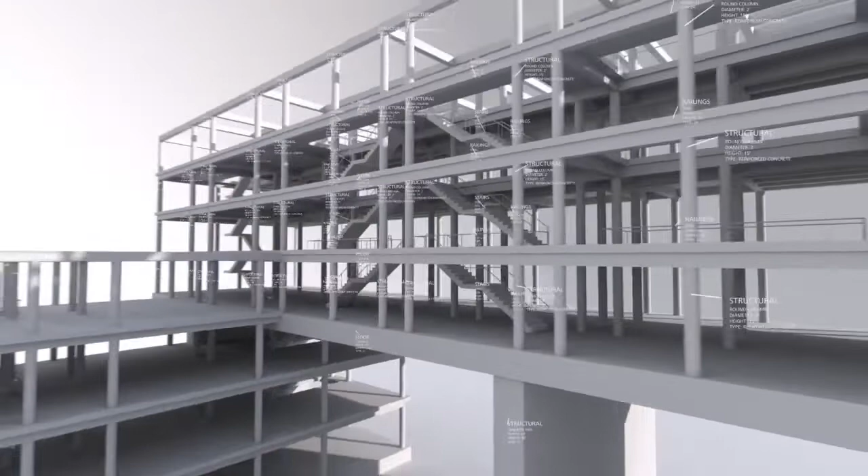BIM can improve coordination and communication between all invested parties. A BIM model illustrates the relationship between a building's spaces and systems, revealing any conflicts or problems. Traditionally, these issues might have resulted in errors or omissions in the contract documents, leading to cost extras and potential delay during the construction phase.

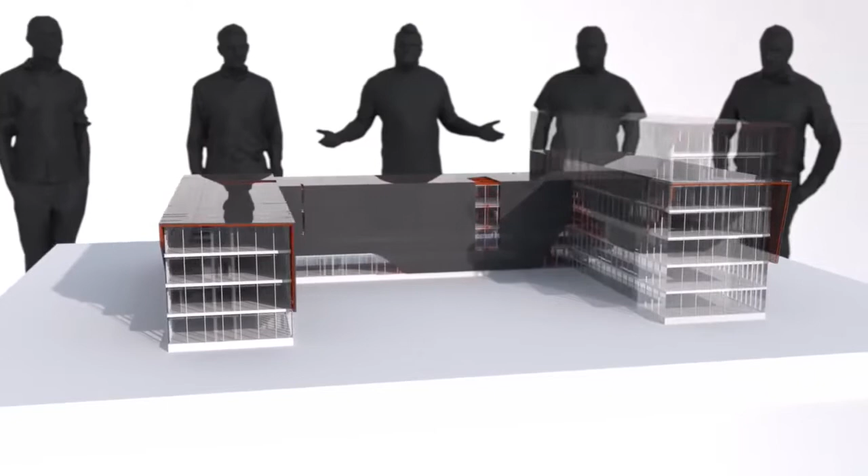A significant advantage of BIM and the use of 3D modeling tools is that all drawings, details, the specifications, and even the bill of quantities are derived from this shared model. With sufficient oversight during the production of the model, it becomes easier to avoid coordination errors and omissions caused by a lack of coordination between disciplines, or oversight in the completeness of the scope described within the documents.

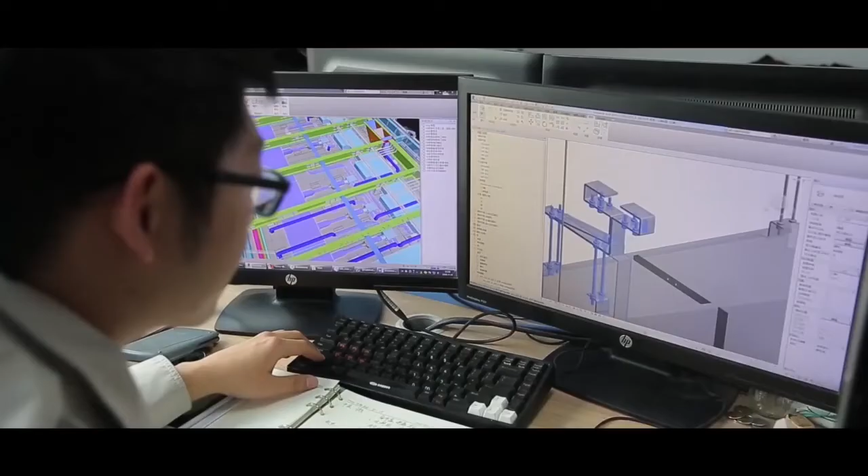In addition to generating graphical representation of building elements, BIM models also manage data associated with each element within the building. This data and the model are updated automatically as changes are made to the model. BIM, therefore, makes it unnecessary to recreate and interpret information each time it is handed off between participants. BIM makes the design information explicit and available to all stakeholders and supports decision-making in construction projects through better management, sharing, and use of information.

In contrast, project participants in the traditional production environment had their own information systems which were structured and suited for their specialized and specific needs. Therefore, the amount of information that could be jointly shared was limited due to the lack of a central source of information. Today, project data is easily accessible through diverse BIM software, which makes the sharing and control of project information more efficient. In other words, BIM gathers core competencies to jointly decide and address on-site-related problems more effectively.

The possibility to perform alternative studies such as energy, lighting, and acoustic analysis of the virtual model is of great importance, especially if the project scope includes designing a building with regard to certain environmental certificates. For standards such as Leadership in Energy and Environmental Design, LEED, energy analysis should be performed in the early design phase by linking a building information model to tools which measure energy usage for heating and cooling during peak periods.

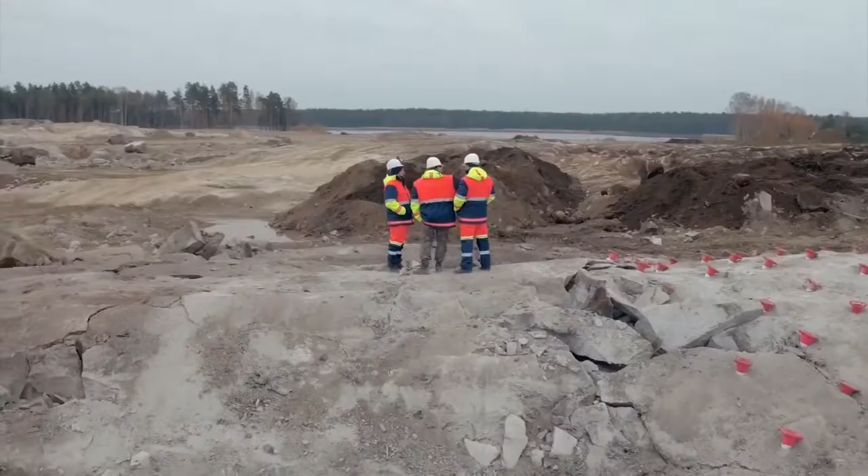It allows users to make energy-conscious decisions and test the energy-saving ideas, thus improving the building quality without postponing the design process. Performing deep sustainability analysis in the design stage is a capability that traditional design methods were not able to do. In accordance with aforementioned issues, BIM provides an opportunity to perform value engineering in an early stage, which enables the design team and project administrators to ensure the design intent.

BIM has revolutionized cost monitoring. BIM software allows accurate projections of total life cycle costs and costs in use. The same principles of data management within BIM also allow the total carbon impact of a project over its life cycle to be evaluated. Assemblies and components within the BIM model may be exported directly by manufacturers for fabrication, reducing the need for separate shop drawings. BIM works best when more project participants use it. Now, more than ever, the benefits of BIM are increasingly seen to outweigh the costs.

BIM implementation requires early involvement of design and construction stakeholders. Although this increases upfront costs, it has been proved overall costs of the construction phase will decrease due to savings gained by avoidance of delays, change orders, claims, and requests for information. The MacLeamy curve shows that design decisions made earlier in the project are more cost-effective, since in this stage the opportunity to influence positive outcomes is highest and the cost of the changes is minimal.

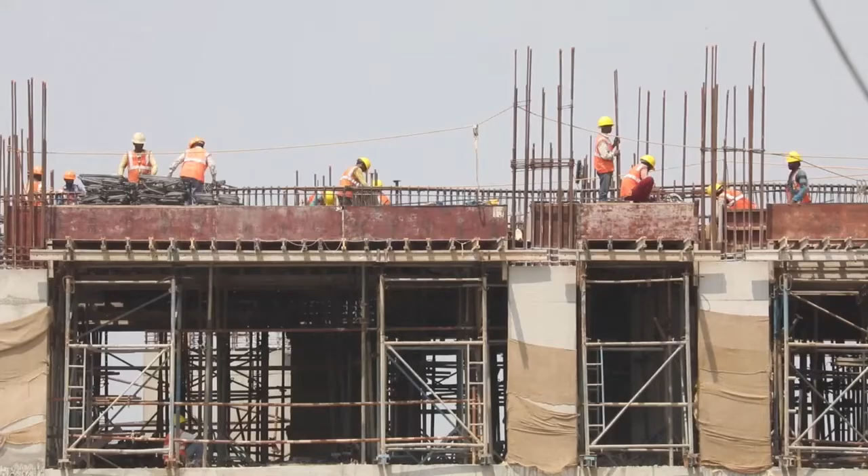BIM technology is not just about a set of technological tools in order to improve old, ineffective processes. It is actually a mediator of innovation that examines and re-engineers all impacted processes and then creates new business processes and strategies. New processes should be employed by construction organizations to fully benefit from BIM advantages, and there has to be a clear plan for implementation and support from top-level management.

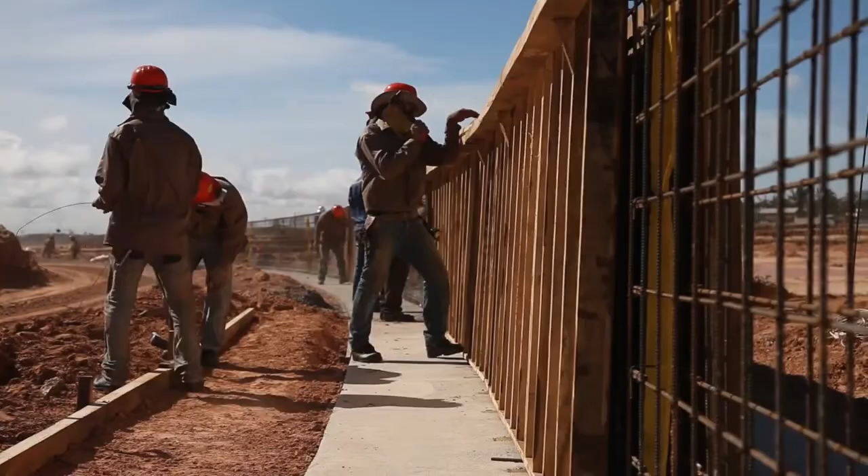Traditional interpersonal roles and relationships within the permanent and temporary organizations in an enhanced environment should change, and new roles in different processes have to be added. New roles are needed to expand knowledge and awareness of BIM within the organization to assure effective implementation. However, a key question still remains: how these roles should be built and introduced within the building project processes.

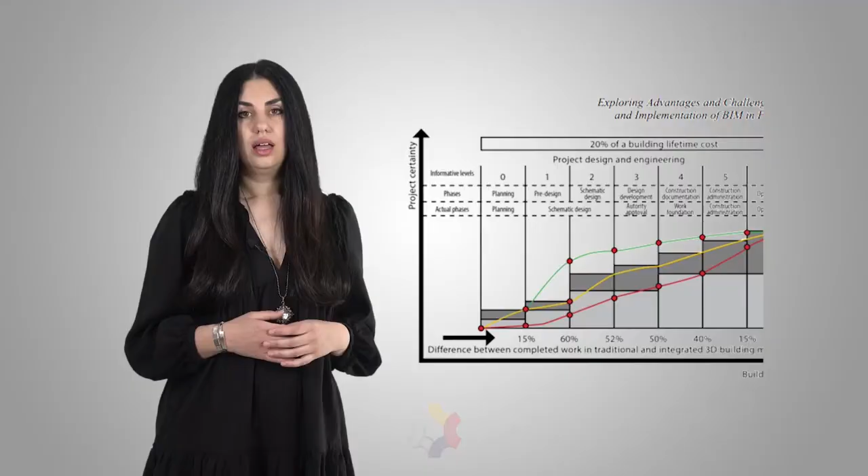BIM aims to maximize the workload in the early design phase. The following graphic shows in a BIM system nearly 75% of design decisions should be made during pre-design and schematic design phases, whereas the remuneration in these phases is only between 5 and 10% of the total project fees. This indicates that the remuneration has to change due to the new project development system.

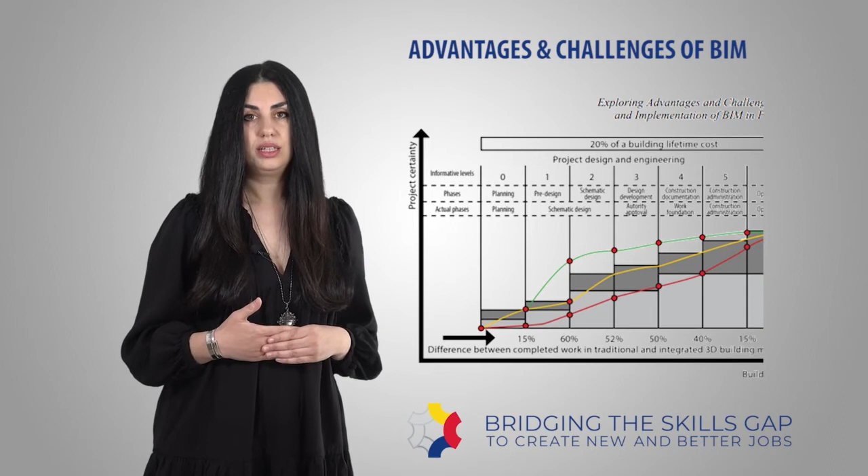Many organizations have witnessed the transition to BIM to be predictably slow. They usually face challenges related to productivity, availability of skills, and process integration. Whenever a new system is put into place, there is almost always an immediate dip in productivity. With time and investment, productivity climbs back to where it was with the original system, with the recovery of the investment made in implementing the change seen as a long-term goal.

Although organizations have some staff members dedicated to using BIM tools from the beginning, most of the more technically experienced architects and engineers, fearful of the impact the change might have on their performance, are reluctant to abandon established methods and familiar software. Young staff members, however, who may have been more open to experimenting with BIM, don't have the practical construction experience to use the software to its full advantage. A strong understanding of design and construction fundamentals is fundamental to using BIM effectively.

Despite these challenges, dedication finally pays off. Improved productivity and the financial benefits of using Revit and BIM clearly surpass the initial productivity loss and financial investment, representing a net gain for the business and strong momentum for the future.